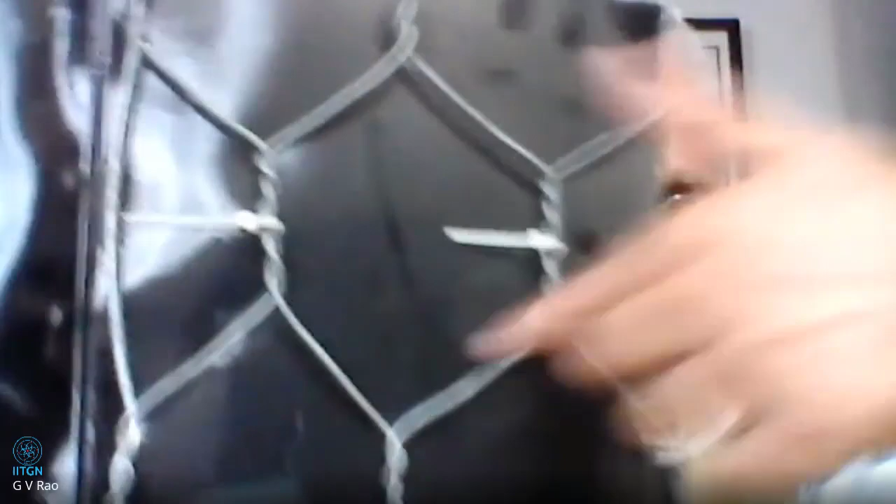Then we also talked of what we call as gabions. I think it's better we see one specimen actually. So what is it we are trying to look at is we are trying to look at this shape actually, hexagonal shape, and then we are looking at this. This is called actually double twisting basically. That means it's mechanically made.

Okay, a lot of machines are there in India. A lot of companies make it. Other point is that it's galvanized. Otherwise, it's steel rod only.

Okay, so depending upon where we are going to use it now, this diameter can change. This shape of this may change slightly, but the dimension of the opening also may change. And then the twisting can also be our own design. So this is actually a product made in Gwalior only.

So then sometimes we may coat it with plastic also. So galvanizing and plastic coating, what we are going to do it now, such that the corrosion is going to be minimal. So these are things I thought I will show you clearly.

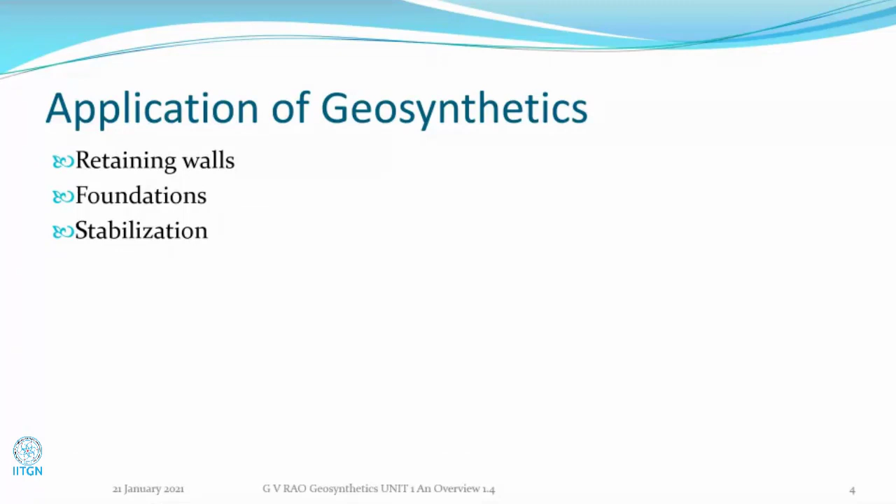Okay, so typically we can think of geotechnical kind of applications in retaining walls, in foundations, in general stabilization, we can think of it. So when you talk of a retaining wall, it can be with a kind of slope also, can be vertical also, you will see all of them, but in principle what is it we are trying to do?

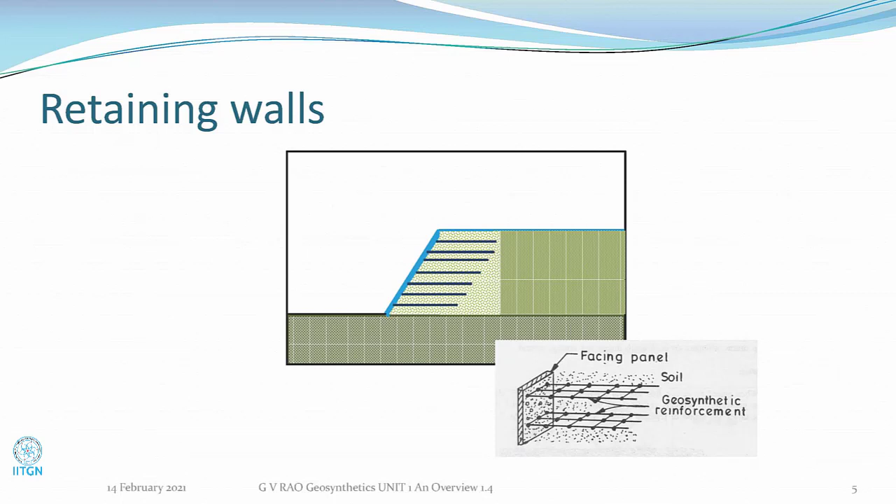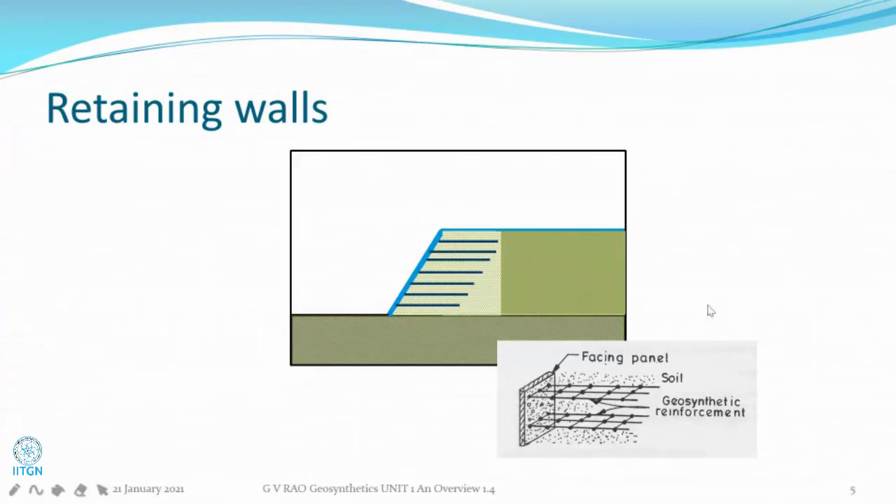We are placing actually within layers of geosynthetics, or within soil now we are placing layers of geosynthetics. So we will talk more about that in the next class onwards. Extensively, obviously, this is a reinforcement application.

Then this principle of this is very simple. As I said, we are having these layers. Multiple layers are there. We try to find out there's pressure acting upon this system. And in principle, it is like a normal retaining wall only. But then the geosynthetic here actually will not allow this wedge to come out.

That is the basic principle now. So there are many varieties of this. We'll spend a lot of time in trying to design geosynthetic retaining structures.

This is a major subject which we are going to follow. There could be geotextiles, geogrids, many kinds of things now. There could be steep slopes, vertical walls, and slopes can be practically very high, up to even 80-90 meters high.

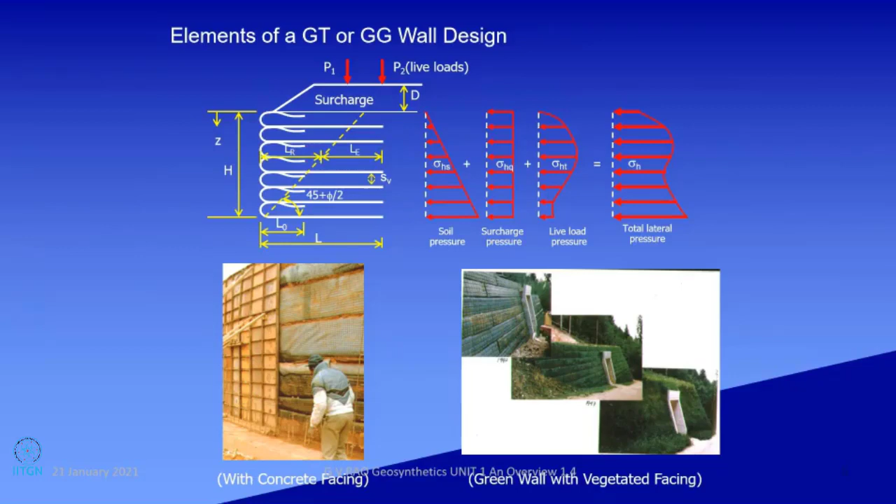Almost we're going to build a mountain. Even steep walls can be up to 35 meters in height. In India, it's very common to make 12 to 15 meters. Around the world now, particularly in the US, they are called mechanically stabilized earth walls, or MSE walls.

We can make the fascia elements as panels, concrete panels like this. They can also be made of block fascia. The main thing is this is where the entire deck slab can rest on the wall, on the retaining structure. So this is actually called a true abutment.

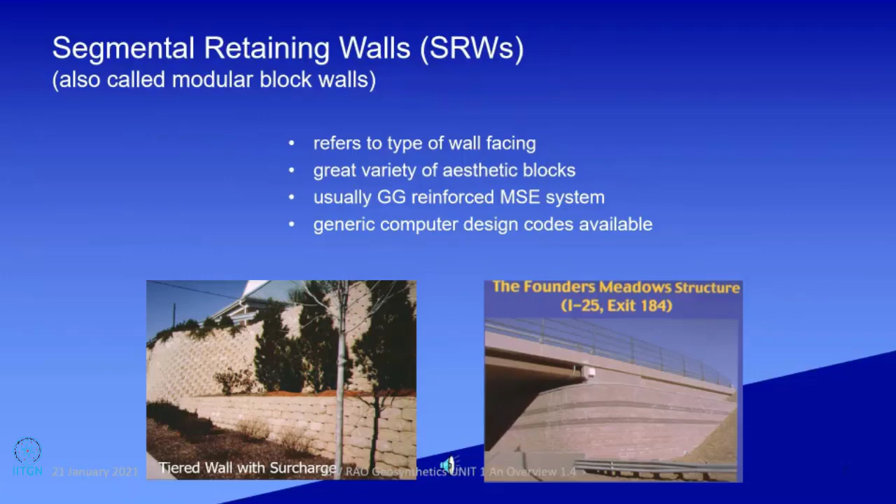In other cases in India, commonly the deck slab will rest on the abutment, we can say pier, and only the approach has a retaining structure. In this true abutment case, the deck slab also rests on this. In fact, in the BIS code which is in the making now, we'll also talk of this.

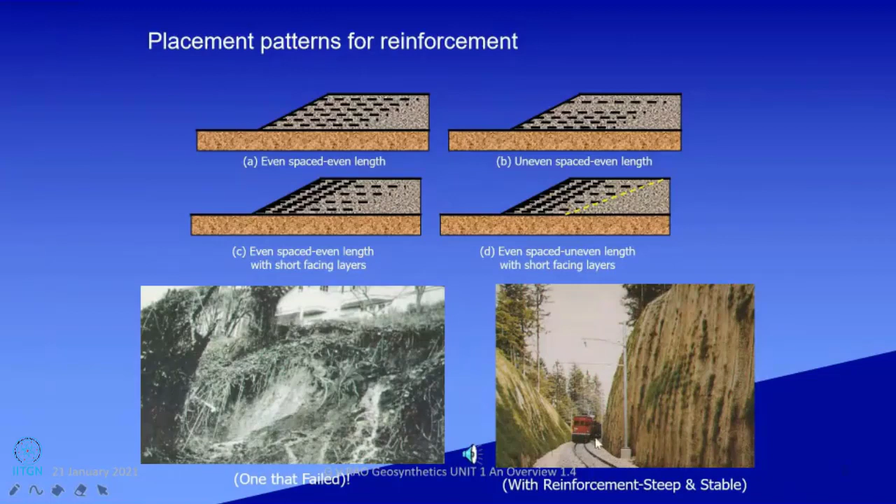We can have reinforced slopes, and different kinds of spacing and lengths can be used, and we can prevent all these things. They can be, as I said, near vertical also, and naturally you can have a railway track, a road, many kinds of structures on top.

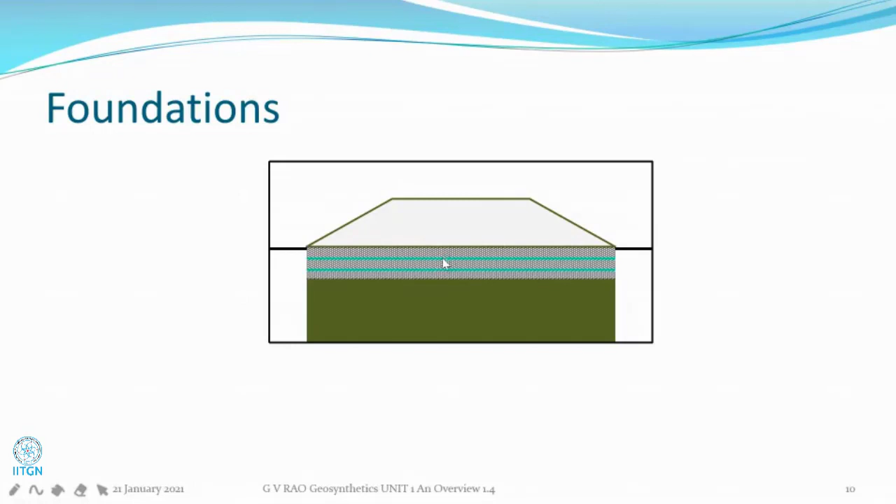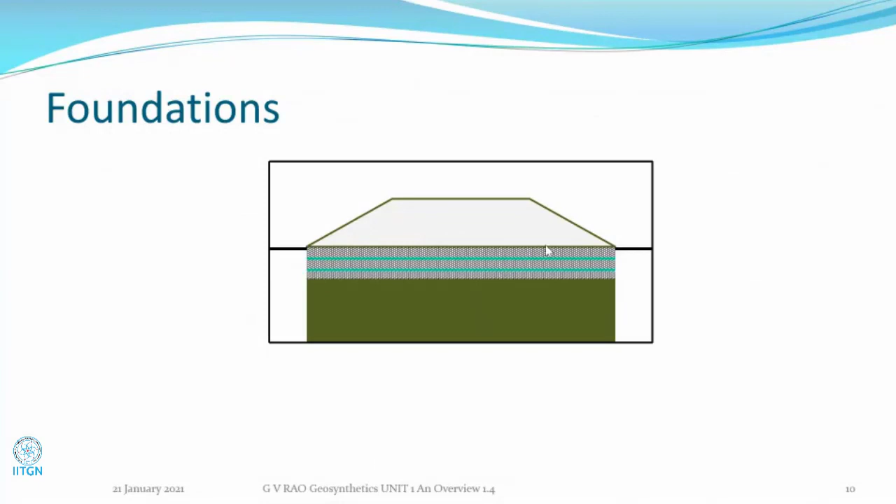Gabion based walls. Then we can improve the foundations also. Mind you, when I say foundation improvement, we are actually talking of bearing capacity improvement, because once a load comes of any kind, the load of the structure is going to be felt by the soft soil, meaning it's going to be subject to settlement. So through this kind of placement of layers of geosynthetic, we can improve the bearing capacity. We'll talk of this later.

There's a huge, say 10 to 10.5 meter high embankment which is an approach to the bridge over river Godavari. You can see this entire thing is the geosynthetic kind of cell, about 1 meter thick, placed before the embankment. This is what we call bearing capacity improvement on a soft black cotton soil, up to 25 meters thick below.

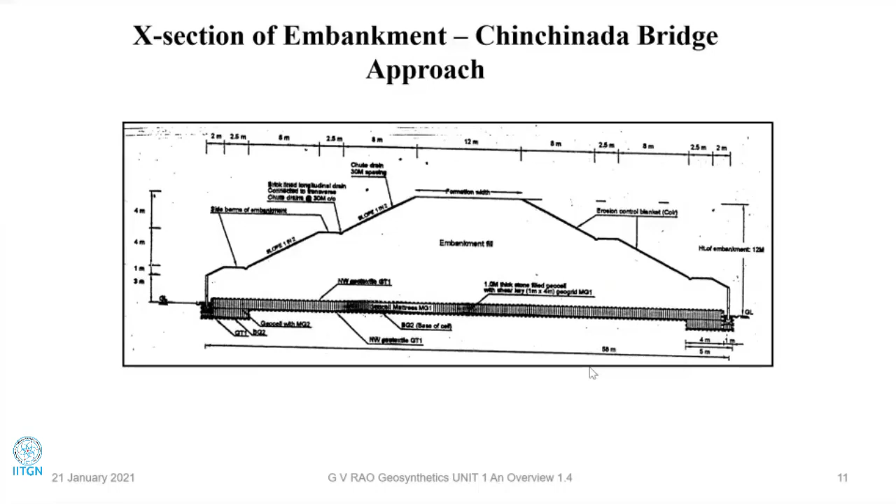In the same way, we can stabilize the layers also, and more of it we'll talk about when we go to pavements now.

Whenever we have a retaining wall, we need to have drainage. Otherwise, if drainage is not allowed, any inflow is going to cause water to remain there. That means the hydrostatic water pressure is going to be added on to the earth pressure, which is going to cause severe damage.

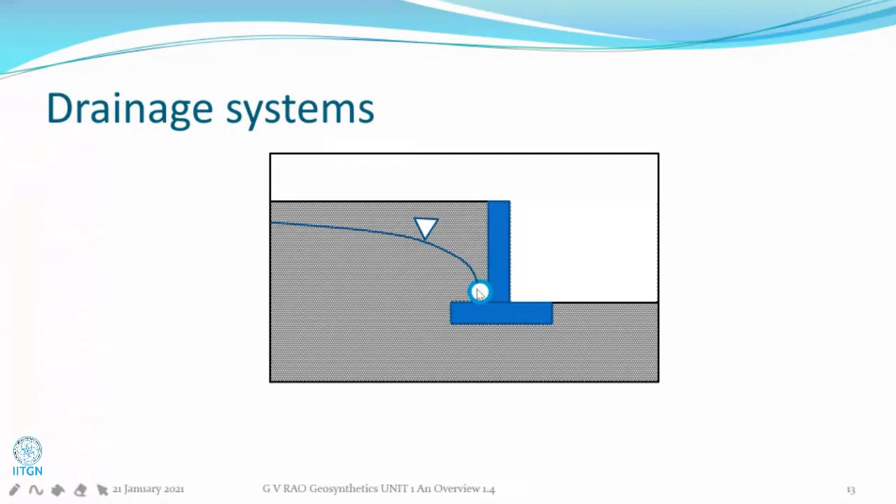So we have many applications of drainage: building drainage, road edge drains, and fin drains, which are much different. I will show a picture of that also. Then garden roofing, horizontal roofing, parking decks, and planters we can have now.

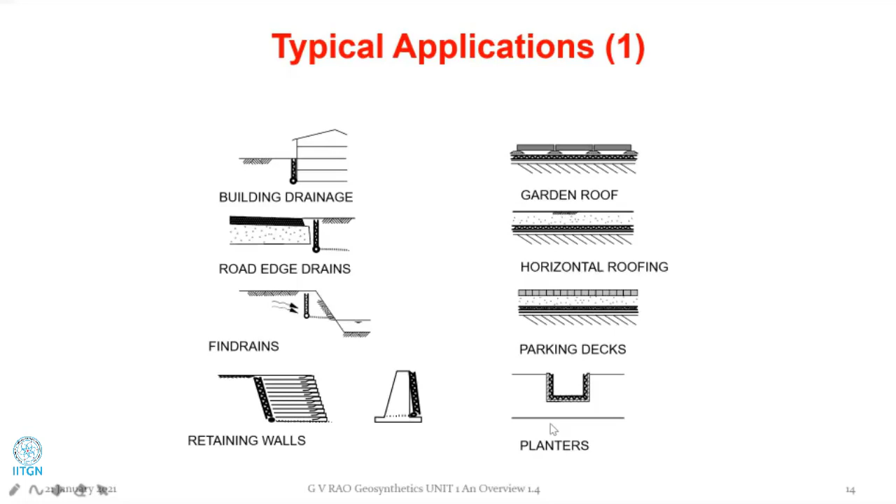The number of applications for drainage is so vast, including gas and water drainage, sports fields. In fact, all the astroturf fields we have for almost all the games today have always got a geotextile at the bottom of the astroturfing, because we don't want any water there, since it would impinge upon the elasticity of the entire turf.

So whenever we have a synthetic turf, that's a very common part of it. You can think of pressure relief, tunnel drainage, which I've just mentioned, and drainage for leachates in landfills.

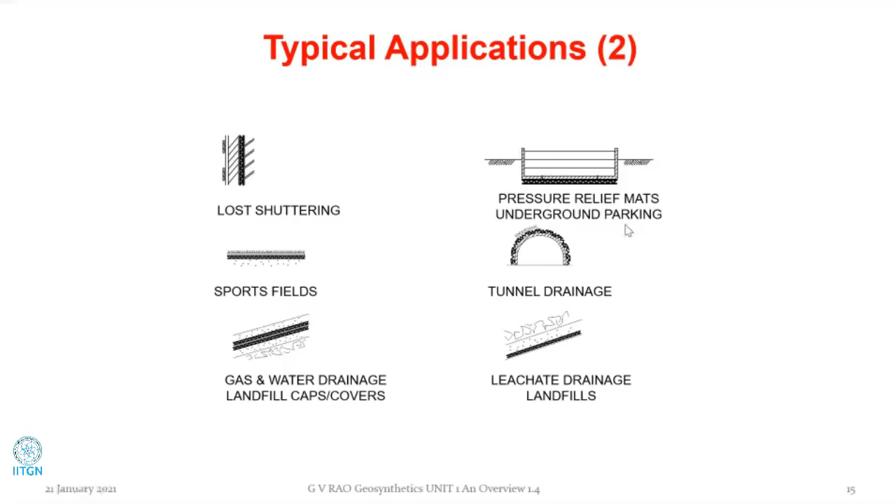So there could be many applications in drainage. This is the kind of fin drain, like a sheet drain we discussed. If this is placed in the soil abutting a retaining structure or basement wall, it will take all the water, route it down, and pump it out. That's how it helps.

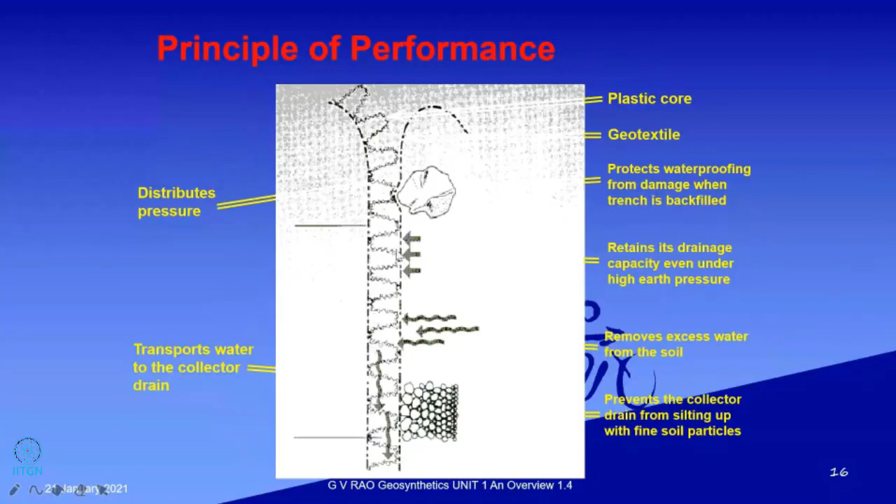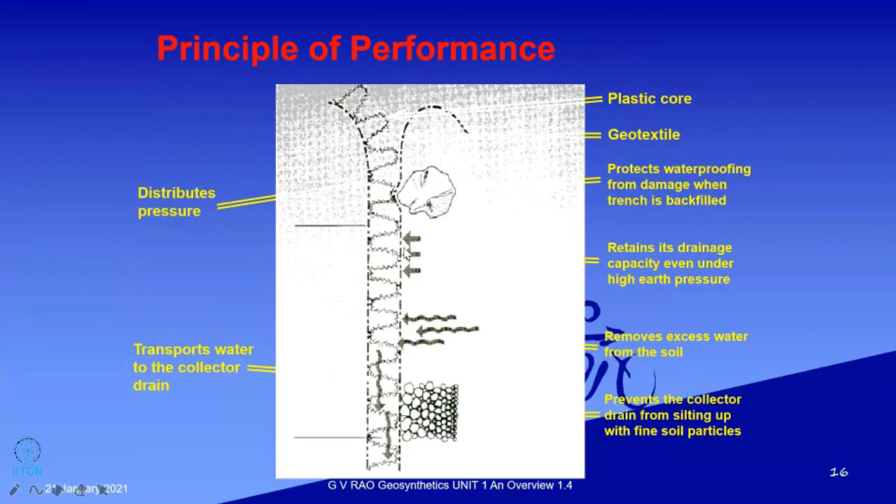Also, when earth pressure acts upon this, remember this is a compressible media. For a basement wall, the earth pressure we normally take into account is the at-rest pressure. But if you place this compressible media, the pressure reduces because of compression in this composite, which is called a fin drain. This reduces the earth pressure from the at-rest condition toward maybe the active condition.

Another important application uses a PVD, which I showed you last time. You can insert these into the ground, and soft soils will naturally get consolidated because the distance water needs to travel for dissipation of excess pore water pressure becomes much shorter with this placement. Many applications of this have been done in coastal regions of the country on soft soils, and these PVD materials are also manufactured domestically.

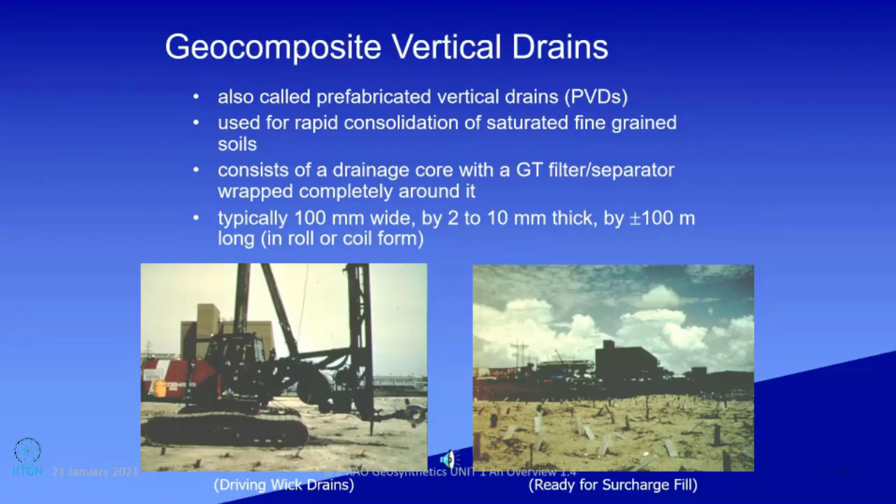So there's a huge reservoir of applications for this subject. In fact, in Gujarat state itself, so many applications have been done. We will have a special lecture on that.

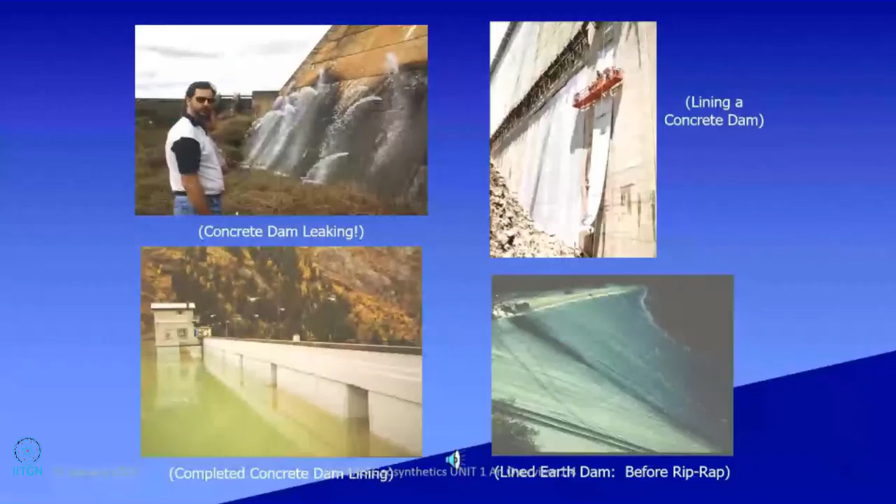Whenever we have dams leaking like this, we can always place a layer for maintenance of the structure. There's a case in Tamil Nadu, a dam called Kadamparai Dam, where the loss was 80,000 liters per minute. That loss was brought down to zero, with no further leakage, by placing a membrane backed by a geotextile.

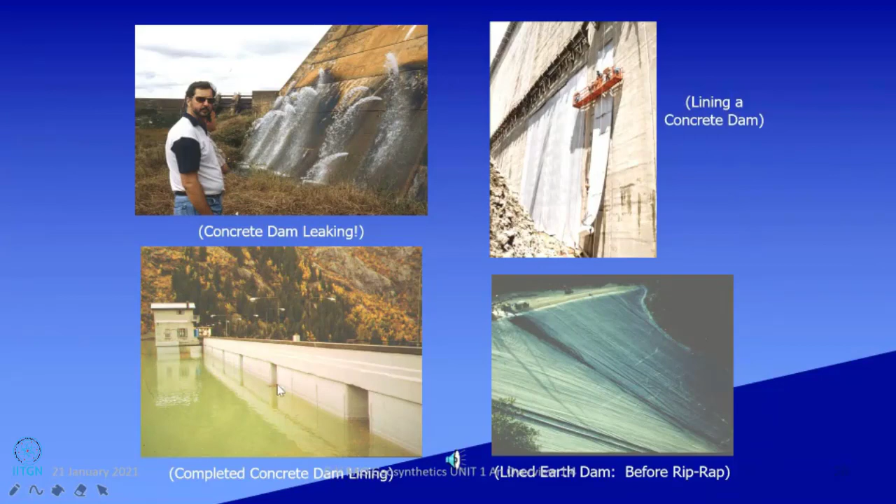So we can think of many structures this way, including canals, and storing fluids in all these cases. We can control the water flow, and absolutely not a drop of water can escape. This membrane can be what we call a geosynthetic membrane, or it could also be a GCL, a geosynthetic clay liner.

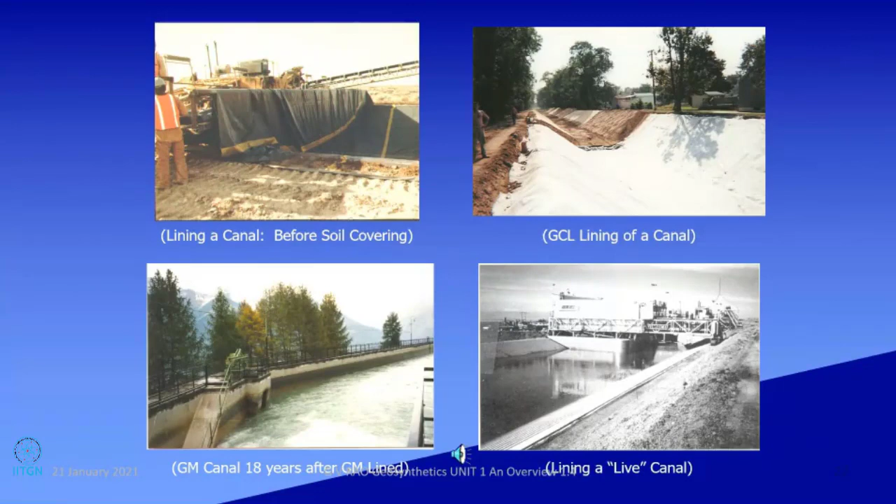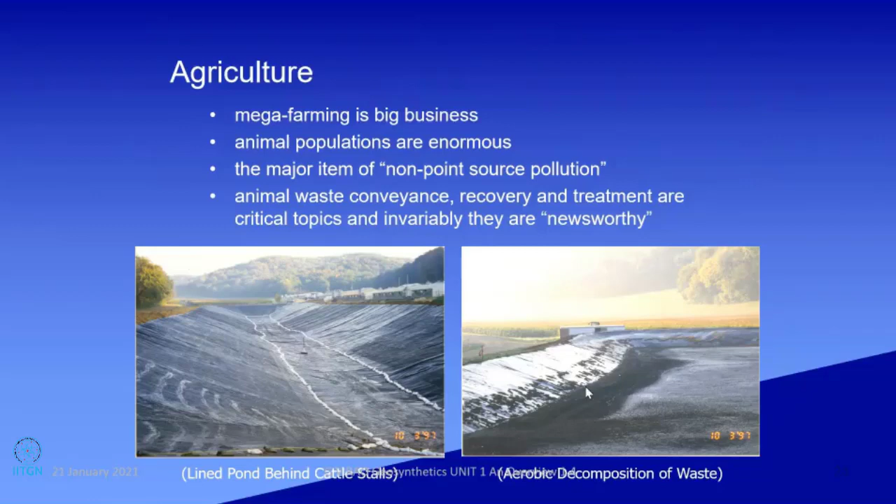Today, the geosynthetic area has also progressed into agriculture. When you say canals, naturally we mean agriculture, since we don't want any loss of water through seepage. So most canals today are lined with membranes and a backing system. We can also line ponds, reservoirs and storage areas so no loss occurs. This has become so common that we make lined ponds and use them for aquaculture.

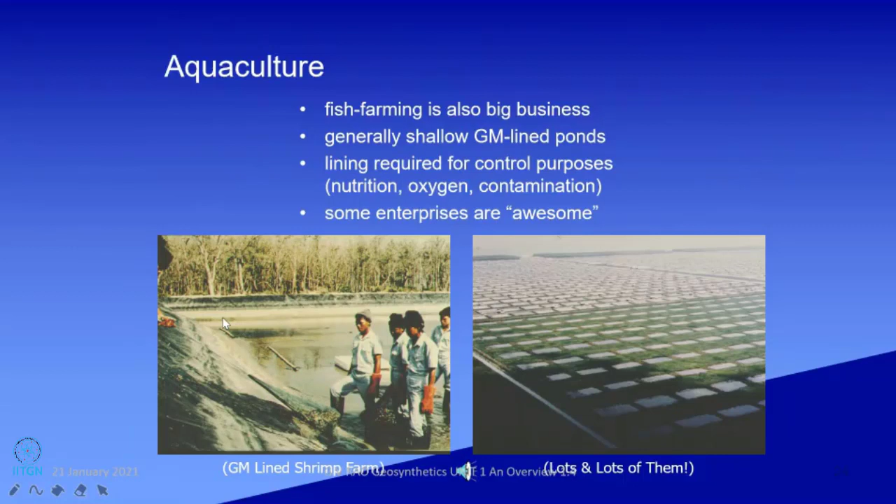This is becoming increasingly common in our country too. Earlier they used to do this in black cotton soils, where there was hardly any loss of water, but that practice was prevented by the Supreme Court through a special injunction. Today we can't allow that kind of situation, and we can't allow any waste leachate to escape. So we have to line them with membranes only.

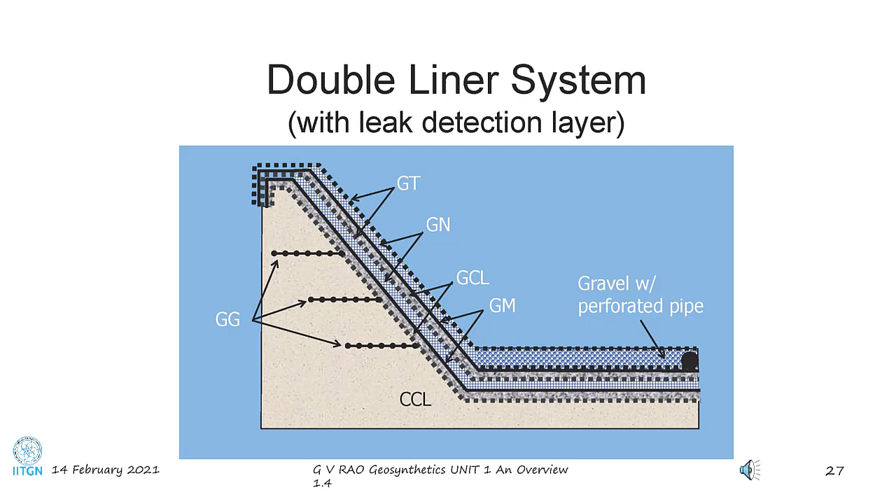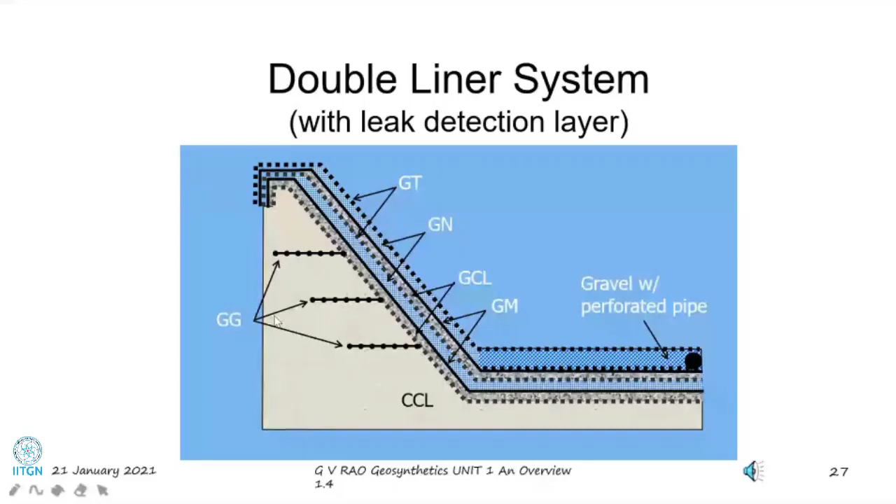In the same way, we can contain engineered landfills using multiple layers of geosynthetics on the bottom or sides of the structure, and later when you cap it as well. In all these applications we use geotextiles, membranes, GCLs, geonets, and geogrids - essentially the full range of geosynthetics appears in a properly engineered landfill, even in the cover. Once the landfill is filled up, we again have multiple layers: geocomposite or geonet, geomembrane, GCL, another geocomposite, geotextile, and geogrid to support it.

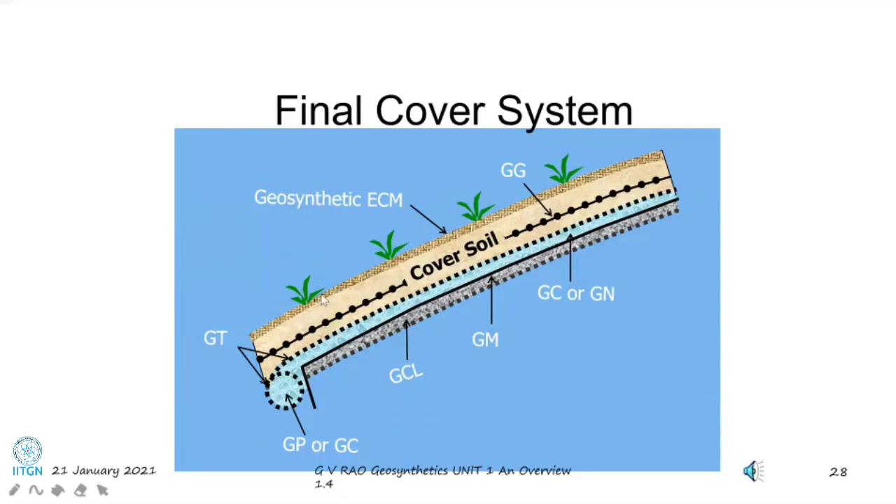We can also think of a layer of jute or coir material to cover it up such that it all looks green. There are many kinds of situations like this.

All landfills, when they're covered, actually need multiple layers. When we start, we also need multiple layers at the base, at the side, and the capping.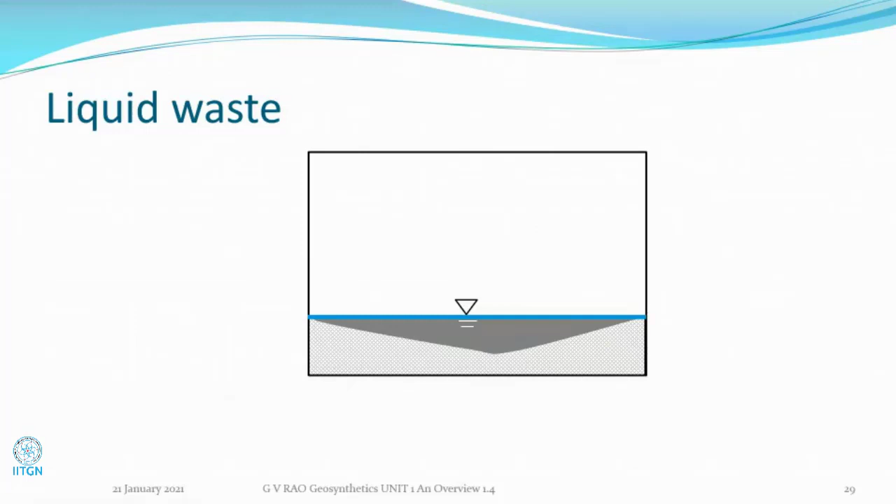Just like we can store water, we can also store hazardous liquids, at least temporarily, in containers - in a structure like a pond or a canal.

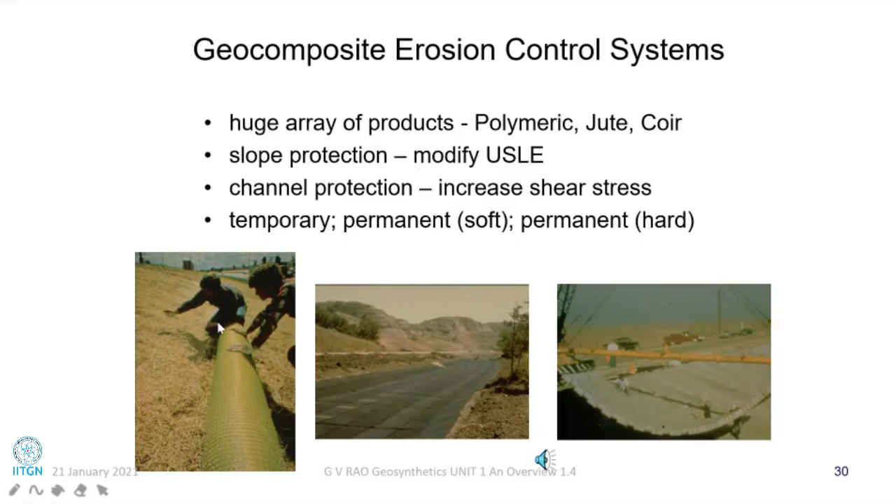For jute, coir, and synthetic erosion control systems, we can just unroll them and have the turfing grow over that.

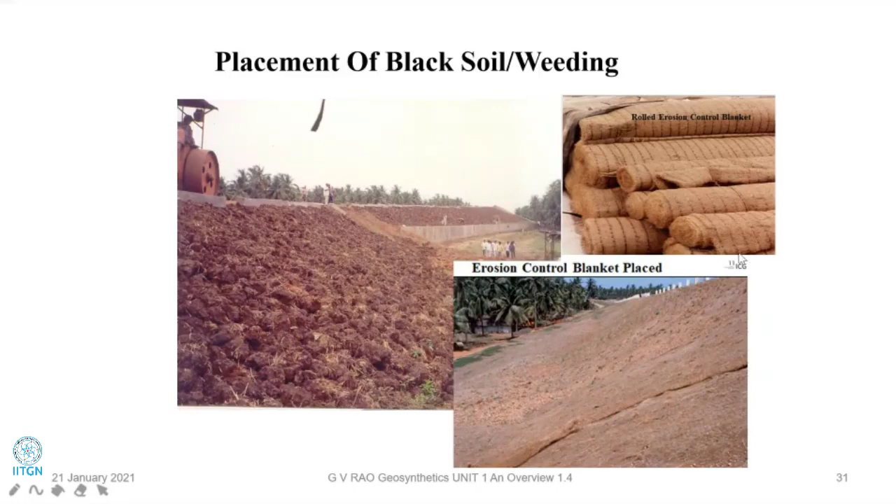You can think of having this kind of rolls, in this case made of coir. This is a special case we have done in Chinchinada, that is in West Godavari district of Andhra Pradesh, and it is spread over here. I will show you the final green cover as we move further.

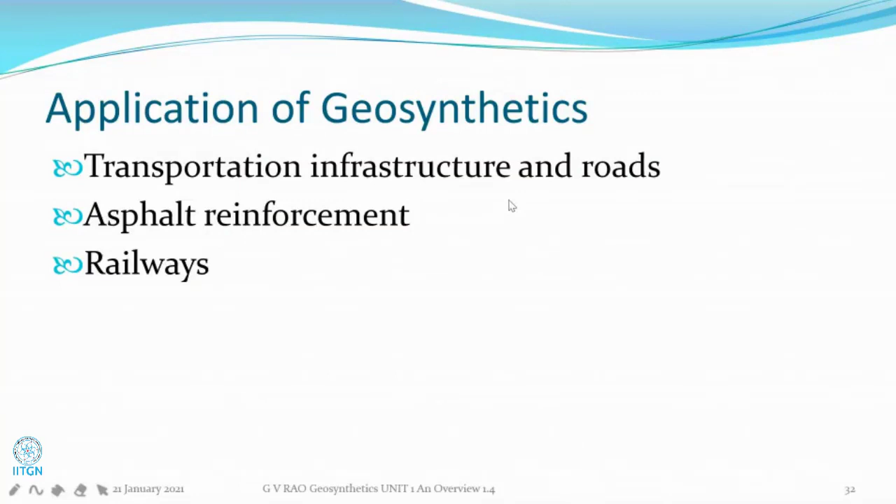Then we have geosynthetics applications in transportation infrastructure and roads, and of course railways, asphaltic reinforcement.

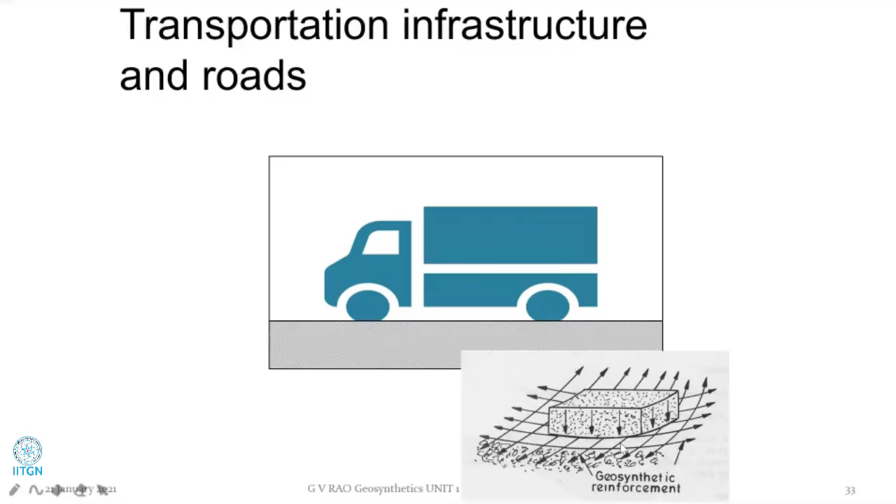Whenever a subgrade is poor, we can place a geosynthetic such that the pavement loads are transferred widely all around, spread such that the stress below this geosynthetic is reduced because of the way the load is spread. Once the stress is reduced, the strain obviously reduces, which leads to long-term performance and minimizes ruts and cracking.

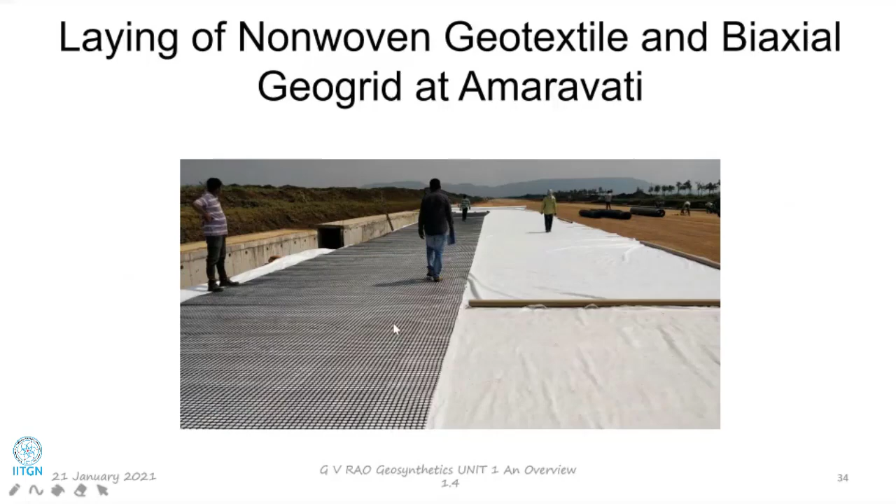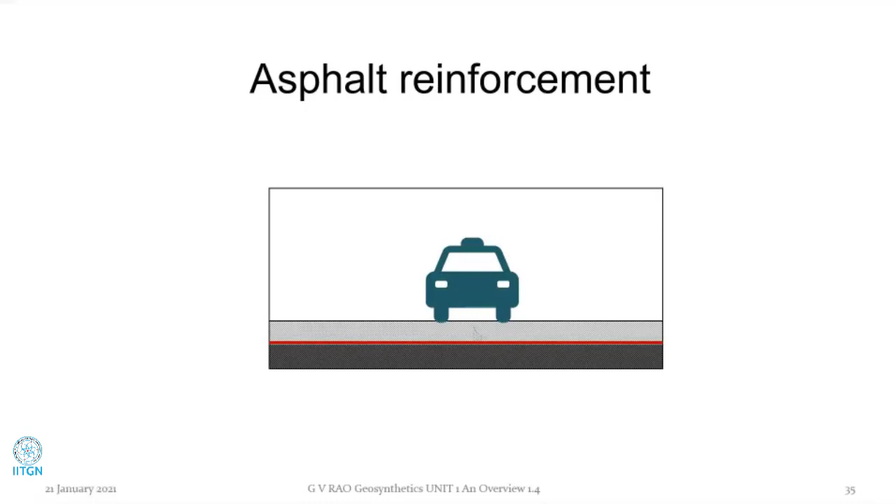So we have what we call edge drains. Edge drains are a must for performance of roads because the number one enemy to any road structure is always going to be water. So if you try to ensure water is not getting into the subgrade, that's best.

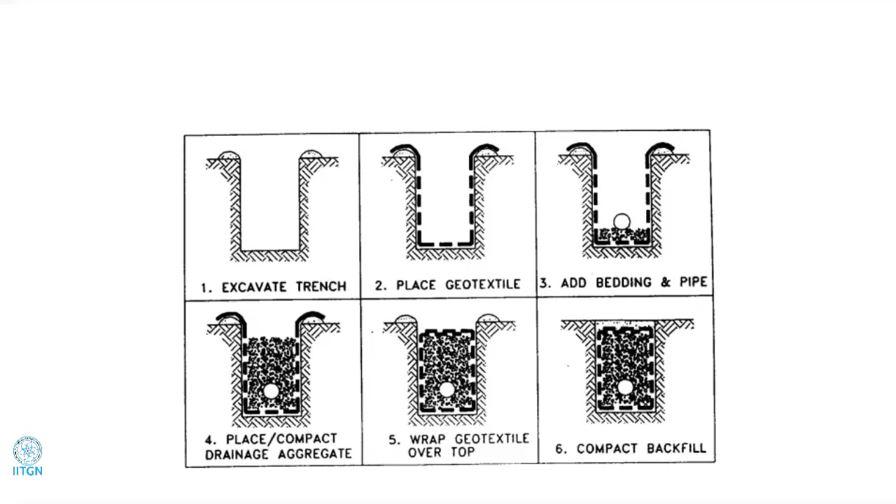It will be allowed to pass longitudinally and later transport to the nearest drain. One way of minimizing water getting into the subgrade is to make a longitudinal trench like this, and then place a geotextile. If you expect a lot of water will come, we can also place a perforated pipe, later fill with gravelly material, cover it up, and fill with soil - this becomes a drain by itself.

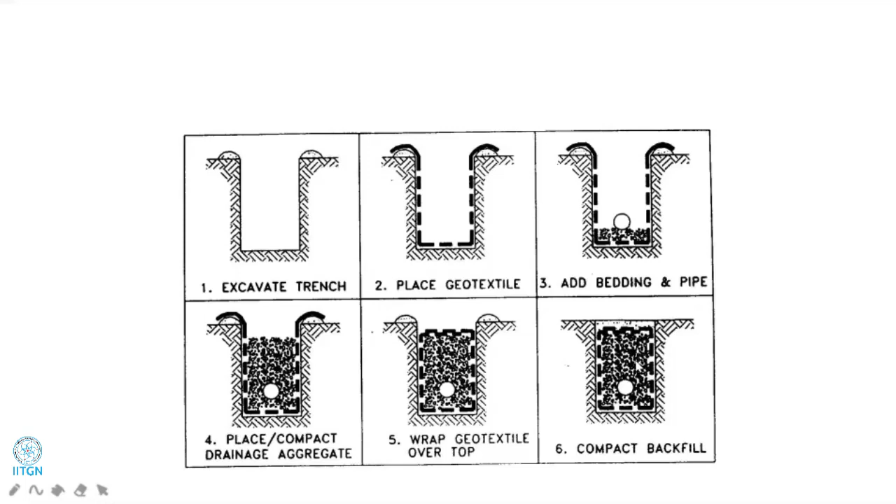So all the water coming from the sides - assume this is the road, this is the pavement layer - gets into this and is carried longitudinally into the nearest drain. That is the way it's done.

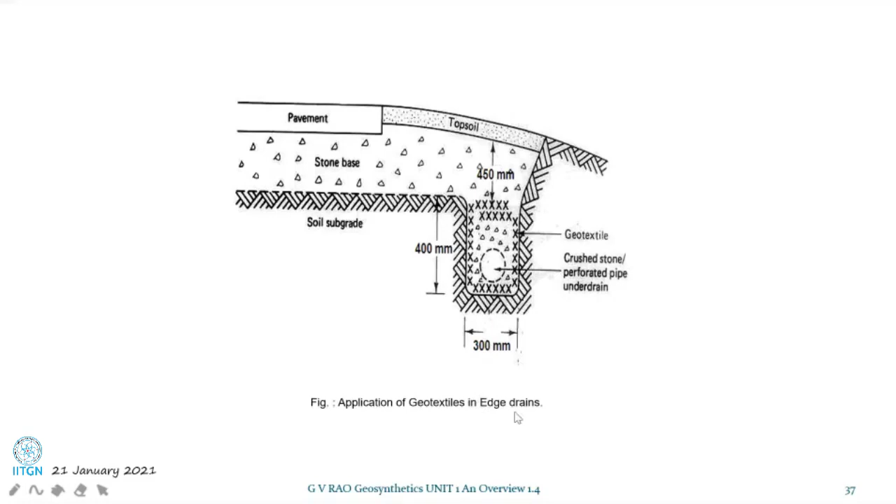So this is what the structure is going to show. The drain can naturally drain the soil only, or the drain can be on the base layer, or it can be on the topsoil, which is a shorter portion. Depending upon where the critical area or critical layer is, we can place the drain the way you want it. These are called edge drains.

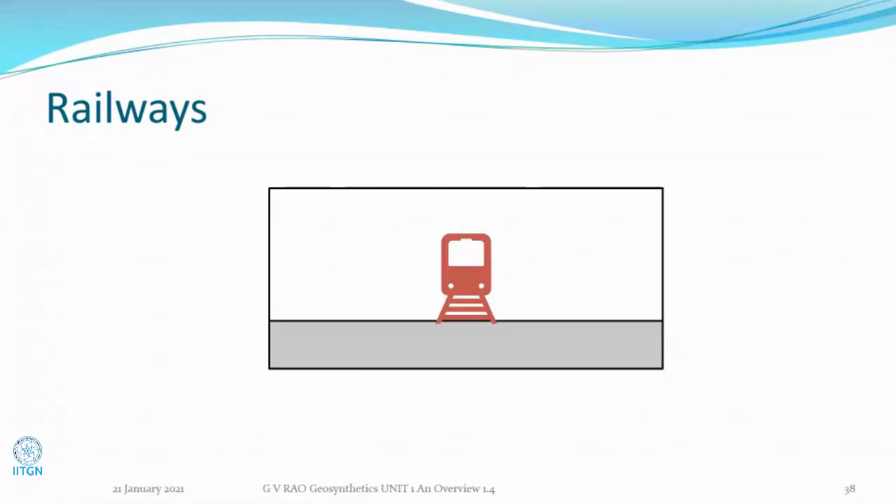Indian Railways have also been trying to use geosynthetics below the ballast layer. Maybe if time permits, we'll talk of that. We brought out a book on this subject, released by IRCON when I was also director of IRCON, by the managing director Mr. Mohan Tiwari. A lot of information is contained in that book.

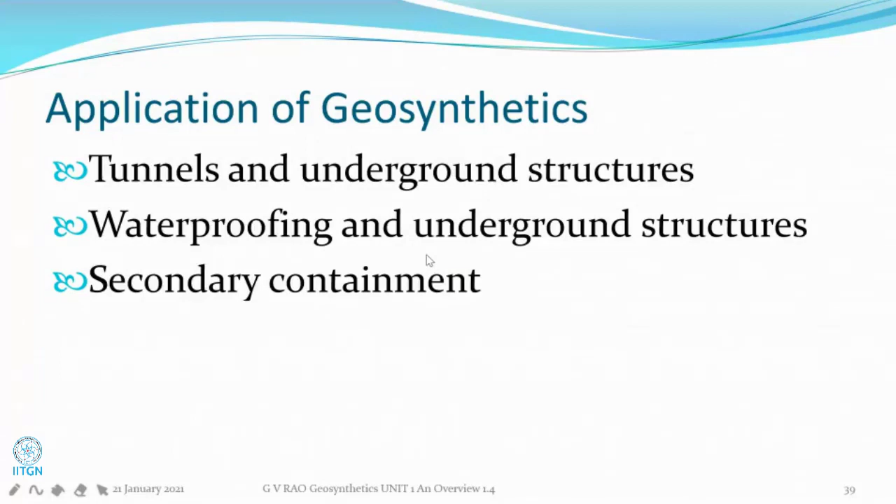Then we have application of geosynthetics in tunnels and underground structures for waterproofing, and also for containment of waste. As we make a tunnel, there are a lot of joints, and water keeps flowing into the tunnel. We have to prevent it.

Initially we try to coat it with shotcrete and reinforce it, then we place a membrane over this. Over that, we place what we call the geotextile, and then the entire thing is ready for concreting. The final lining system with concrete will be done. These are very thick geotextiles and membranes used in this case.

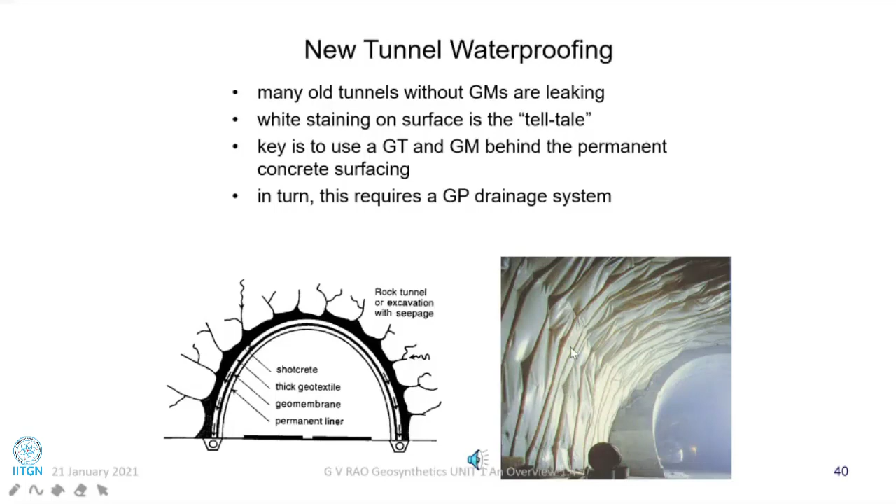When I was in IRCON, I have seen the Banihal tunnel also. Even in all these places, they have been using this extensively. And we also have waste, including nuclear waste.

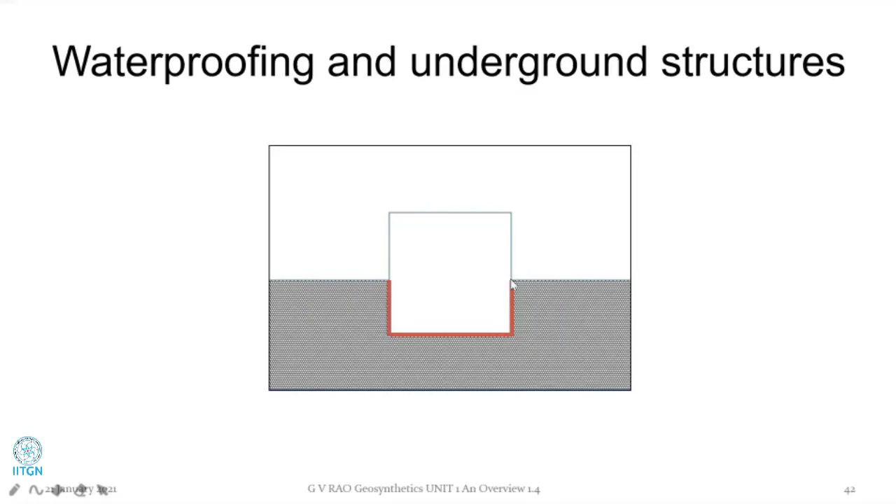When you make these underground structures, they are lined not only for waterproofing, but also to ensure that nuclear waste does not come out. We have special containers made like this, so that the waste material does not leach any chemicals or hazardous waste into the groundwater, and so they're called secondary containment.

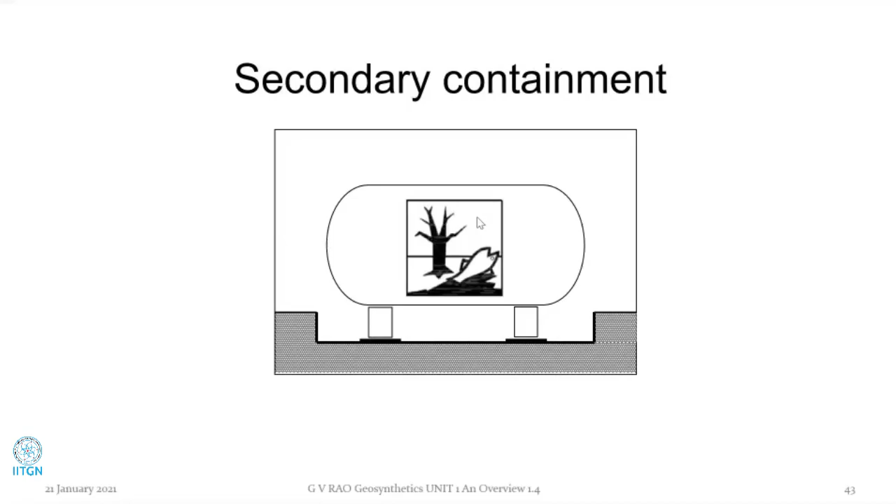That means very caustic kinds of waste, including nuclear waste, can also be contained. The only concern is material that could cause damage, such as nuclear waste or other special waste, highly concentrated waste including chemically active ash, and that containment is done using a geosynthetic liner system. Then, of course, most commonly we have coastal and river bank erosion control, reservoirs, dams, and canals.

I already showed this to you. So one structure we use for the beach: when you have waves coming in, it erodes the slope.

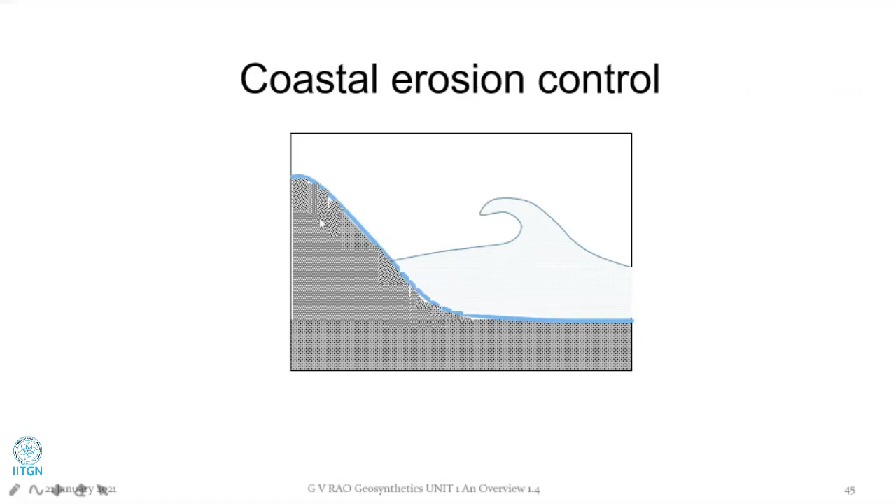Since long, it has been a practice to initially place stones or tetrapods, but none of them actually sincerely protect the soil behind the slope. That is best done, for example, in this fashion.

Instead of directly allowing water to come into the slope at a bank, river bank, or coastal erosion site, instead of just having stones individually placed, we may place a geotextile below that, which ensures that only water flows through, and the stones are naturally held in place.

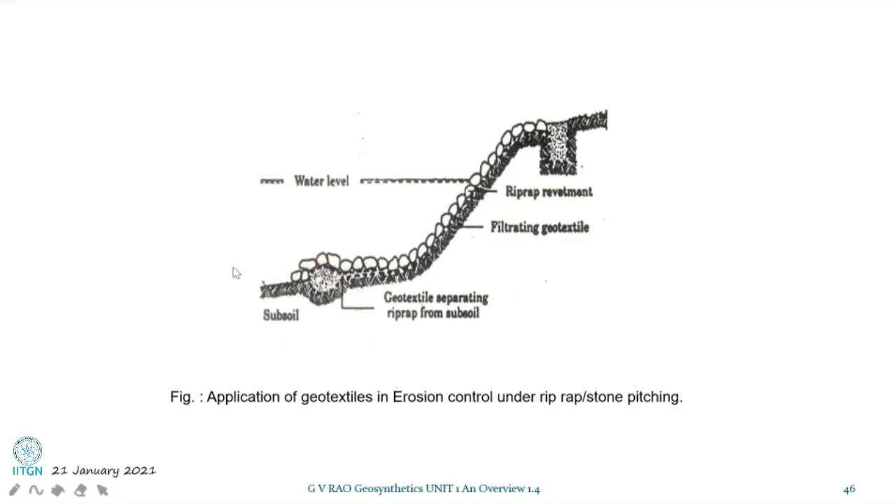The system is explained simply here, but we also have many systems not mentioned, made with woven or non-woven geotextiles. We have bags of different sizes; smaller sizes can be filled by labor, and then they can be used to cover a critical slope or critical bank in a river.

This picture shows the Sarda River in UP, behind which was a non-woven geotextile. There are also tubes, which could be 3 meters in diameter and normally about 20 meters long. They can be placed on the shores, buried, and weighed down to see that the bed of the canal or river is not eroded. These are the tubes.

We can also make heavy geotextile container kind of structures. The sand is contained and the entire thing is dumped into the ground, such that a jetty or other structure being made has a good base. Basically, these are all geosystems, geotextile systems, and they are of very common use today.

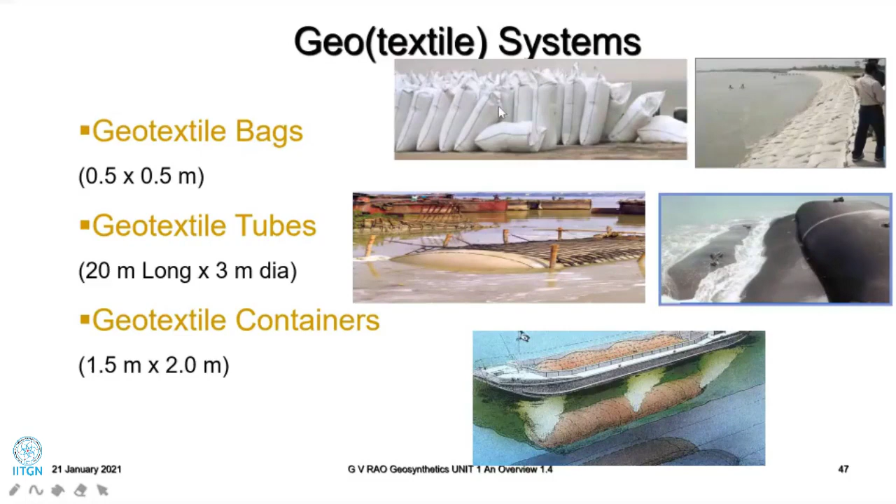Geotextile bags have started being used very extensively, except that the placement is not always very proper. But they have been found to be quite successful in today's world. One such tube we used is in Uppada, Andhra Pradesh, shown here. This is just a cover for this using rope gabions.

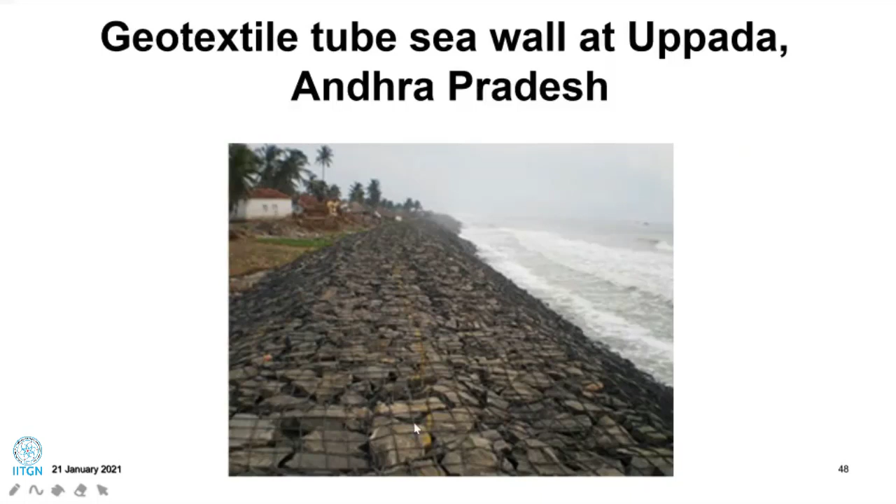It's just a protection so that the waves coming in, including tsunami waves, don't attack the tube itself, and the wave energy is dissipated by using this. These are all basically PP ropes to contain them. So just to summarize the whole thing, if you think of applications...

Subgrade pavement stabilization - the functions could be separation, reinforcement, filtration. The product can be used as geotextile or geogrid. Railroad trackbed stabilization - drainage, separation, filtration - geotextile or geogrid. Asphalt overlay - stress relieving layer, waterproofing - could be glass grid, geotextile, or geogrid.

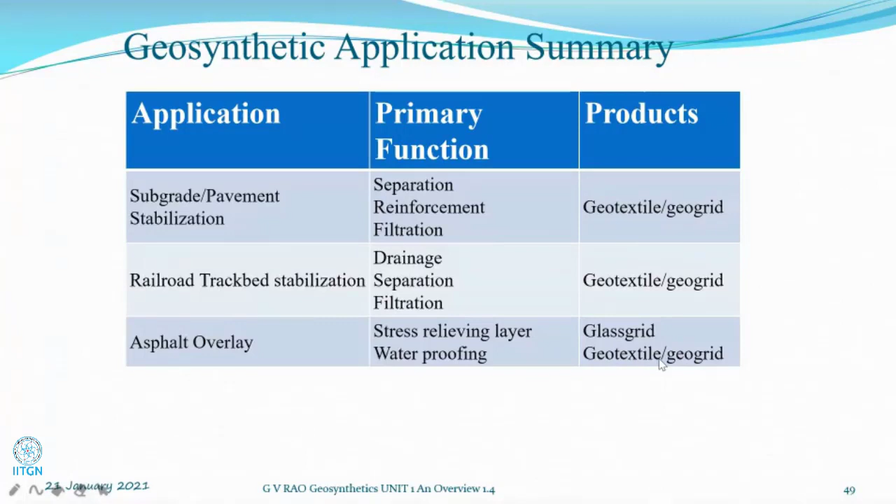Then we have soil reinforcement - embankment, steep slopes, vertical walls - again reinforcement is the primary function. We can think of using either geotextile or geogrid for any of them. Then drainage, subsurface drainage - I told you edge drains are also called French drains. And then filtration is the main thing.

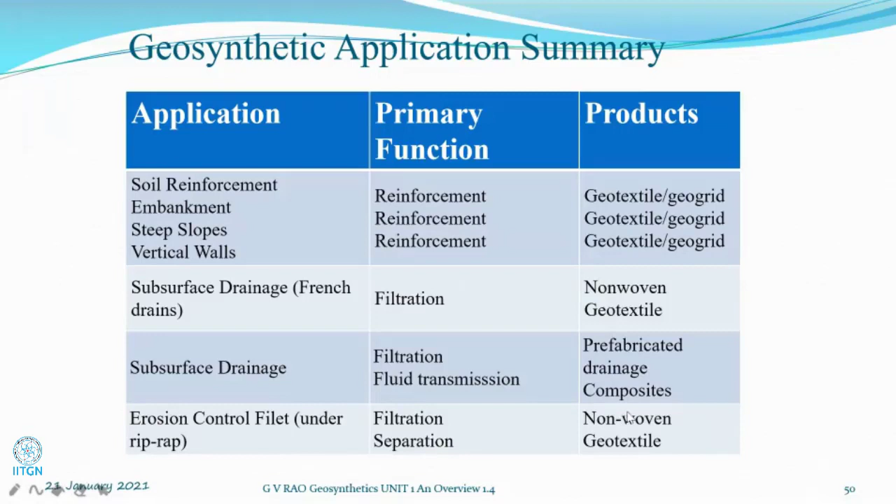Non-woven geotextile is obviously the most common for subsurface drainage, filtration, and fluid transmission. Prefabricated drainage composites are the best option. Then erosion control, under riprap, filtration, separation - non-woven geotextile is the best. Then we have surface erosion control, which I showed you, turf reinforcement.

So we find that the applications are many, but when you are trying to address an issue, naturally we are going to pick up what function is required. Once you have identified the function required, it's easy to find out the products. Mind you, in all cases we usually recommend more than one product - it's not that only one product is best. It can be a variety of combinations.

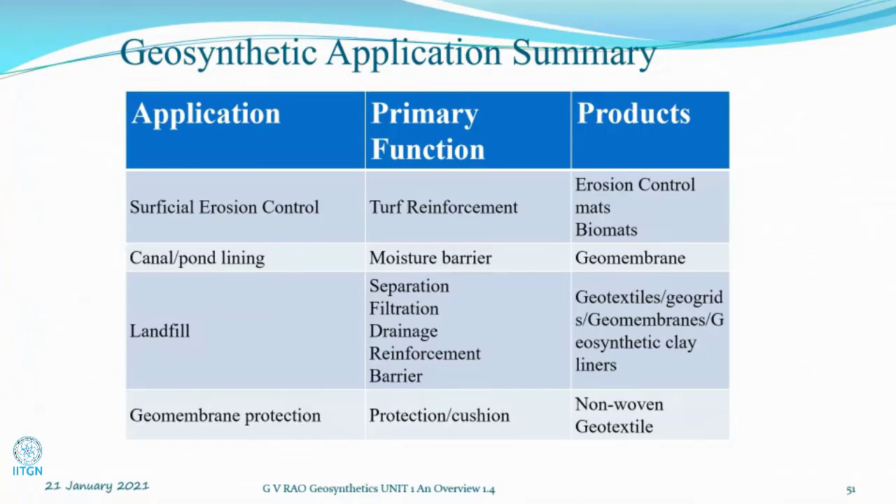And within a product category also, what is the thickness, what is the weight, what is the strength, what is the permeability - many things are going to be considered before we choose a particular kind of geosynthetic. So that is what we are looking at.

So to summarize the whole thing, through all the survey and extensive use in development over the last, say in India, 35 years, we find clearly geosynthetics are bona fide engineering materials. Today we have test methods and designs available. Continuous improvement is being done in design procedures based upon our experience and international experience.

The basic advantage of geosynthetics is quality control of factory manufactured products, because once they are made in factories in India particularly, you can always go and inspect it. We can get it tested wherever you want - in accredited laboratories, or you can pick up samples from there and get them tested. So there's no hanky-panky in this. But each product must be accompanied by rigorous construction quality control and construction quality assurance in the field also.

And in fact this is what we start with when you go to the next topic of geotextiles, because testing and evaluation of the product is going to be most important for us in many different ways. Then, of course, wherever used, except for small issues where construction or design could be an issue, field performance has been excellent. And the potential, as I said earlier, is awesome - something fantastic, you can say very easily.

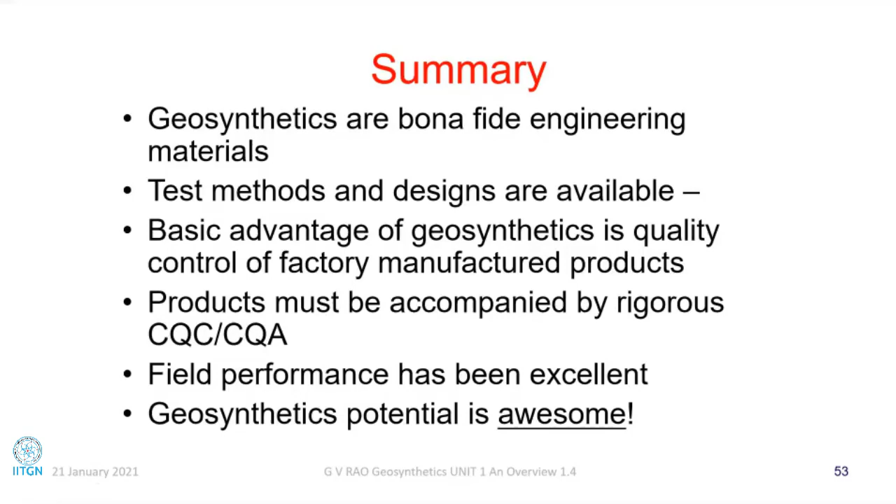And with this, I have always been mentioning to you that these geosynthetics have played a role in the country, more so because they all began to be manufactured in our country now, manufacturing to world-class kind of materials and also exporting them in a big way.